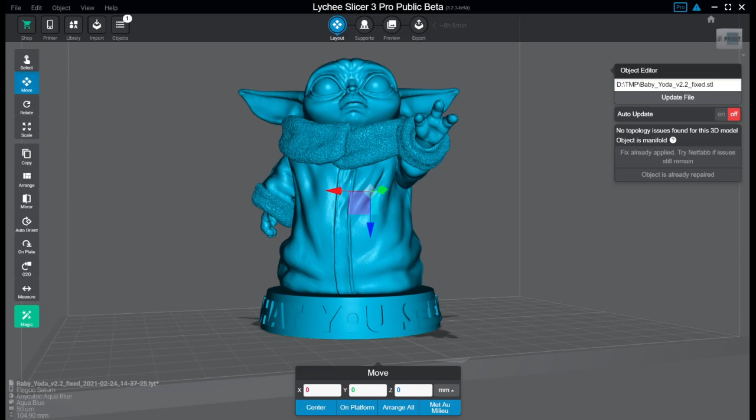But then we'll take a look at what we can do with this little fellow here when it comes to the leaning and the angles. Since I am working with an Elegoo Saturn with a 4K screen, I'm going to use 50 micrometers of layer height. We are going to use the 45-degree angle, and, well, something happened there, sorry about the glitch. I was saying that it's quite important that you try to figure out where you will have best benefit and which way to lean your print object. I like to have this hand going towards the bottom of the vat so it can grow undisturbed.

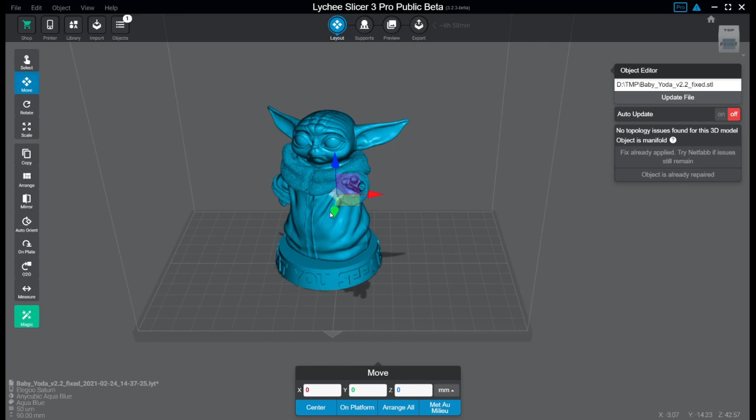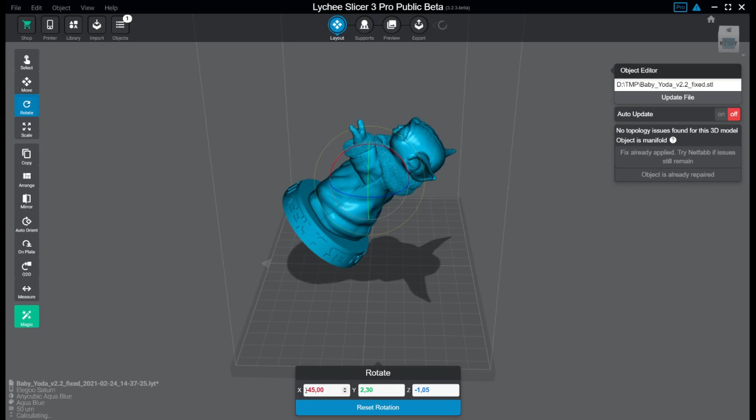So first of all, we're going to rotate him. No, not like that. There we have a handle. Minus 45 degrees. And yeah, I think that's going to be okay. I'm going to rotate him in this way as well, just so he'll fit on the plate nicely.

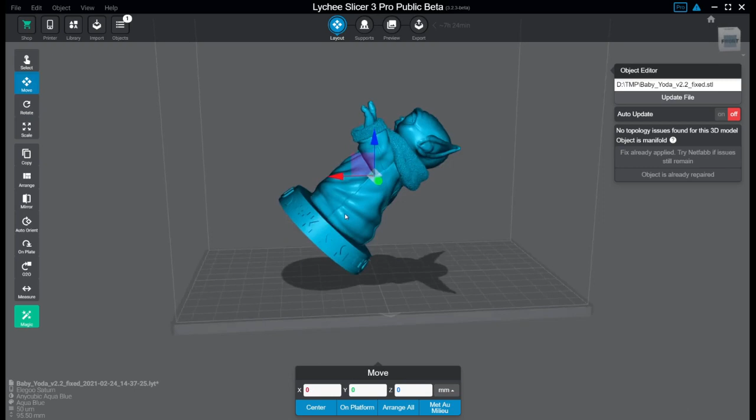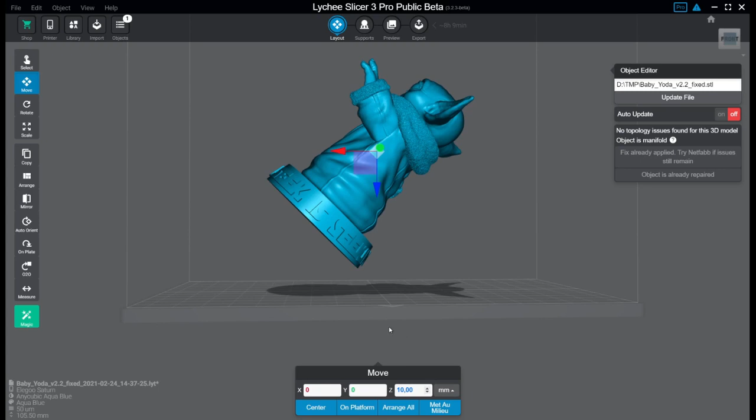Then I'm going to move him up a little, so I get him off the plate. I like 5 millimeters or similar, or up to 10 millimeters. 10 millimeters is actually really good, because then it will be able to build the supports properly below. So now we have the lean, and we have raised him off the plate. I think I'm quite satisfied with this position. And now we go to supports.

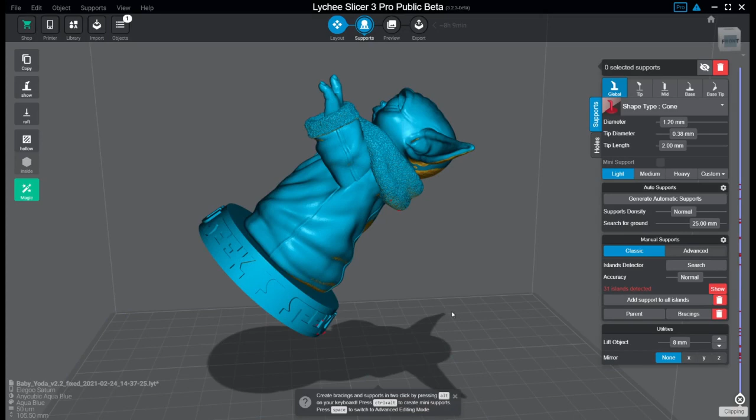As in the last video, I do an island detection first. 31 islands detected. As you see here, here's a bunch. So let's add support to all islands. And it actually caught them all. 0 islands detected. This is actually one of the benefits of leaning as well, because you eliminate the islands on the front of the print, and you get better access to the islands on the back.

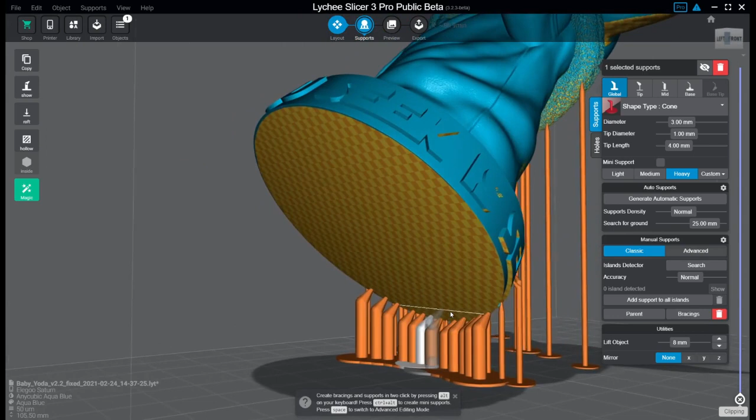And from here on, we'll actually just go ahead with the regular supports. I like to start with the heavy supports, and I like to build them as much as possible in the bottom of the print, so they get a steady hold. And I said in the last video that don't be afraid to use a lot of supports. And by putting the supports here on the bottom, you won't get so many visible marks of them if you have issues with removing them. But I use the heavy supports here, so we get a really good hold towards the plate.

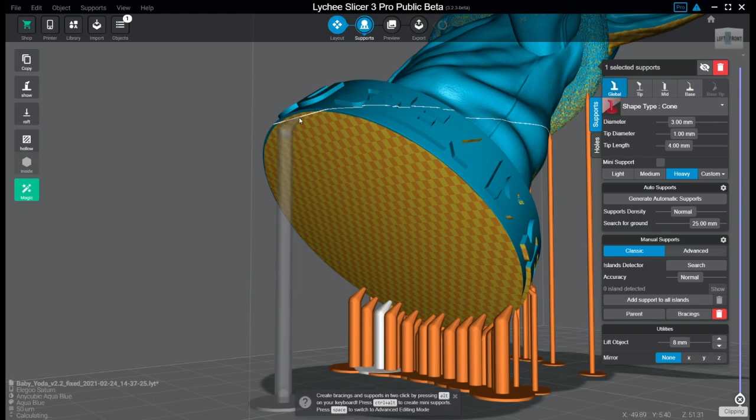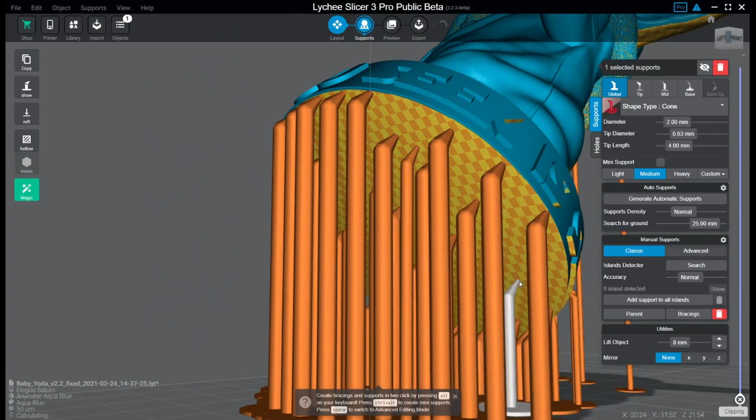And I actually put some up here as well to help stabilize the little fella. So in invisible areas, I do like a lot of supports and heavy supports. And when I've done with the heavy supports, I actually put on some medium as well in between, just to be sure, because we all know the feeling when your print is stuck in the bottom of the vat.

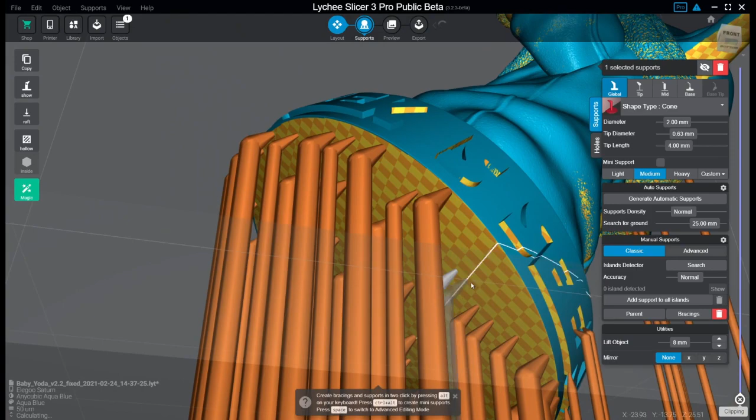Here we have got the little fellow quite well anchored, but we're still not done. You will have to put on supports elsewhere as well. Otherwise he will break off or similar. As you see here, you get these... I'll remove that support. You see, you get these white large areas.

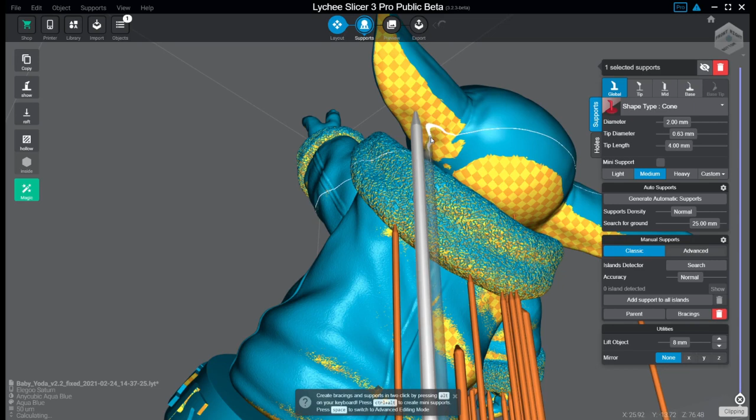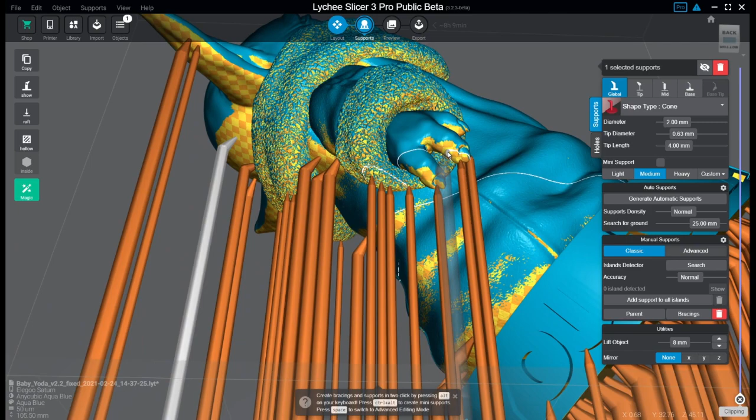These are the lowest parts of that area where you're putting on supports. So every time you get a large white blob like this, you see here, the line is thin, but here it goes bigger. It is always good to put supports on those places. Like here on this ear, and here you can't, but I can actually put one there. I'd actually like to support his fingers a little bit more as well. But it looks like the auto supports for the islands have taken care of a lot of the problems. We'll put one here as well. And one up here.

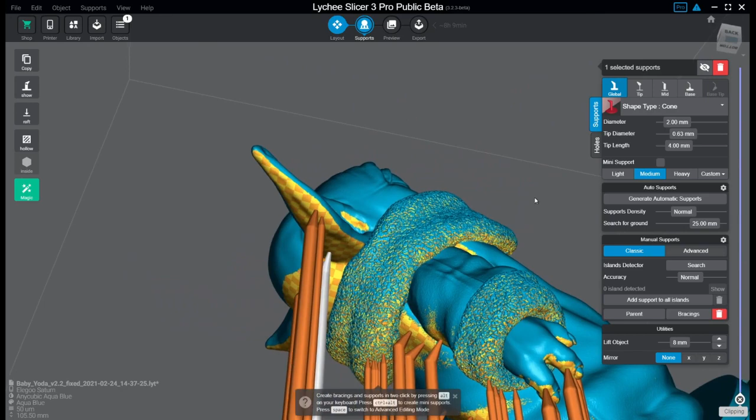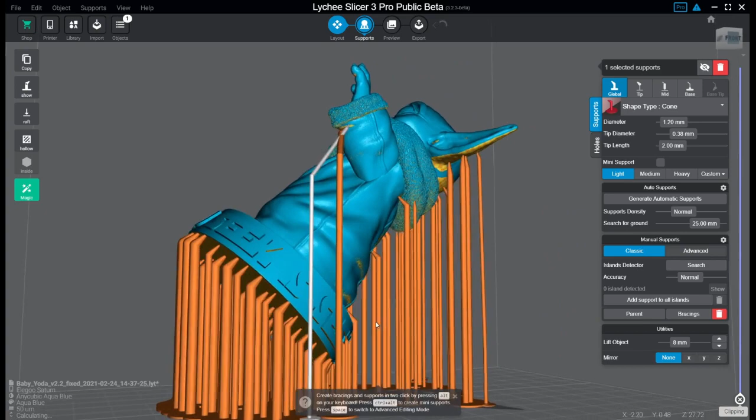Okay, look if you have any more larger yellow areas where we can put in some extra supports. All supports are helpful, but sometimes you have to consider the markings you can get. But at the same time, better little marks you can fill in with some extra resin and a UV light than having it deformed. I'll put some light ones here as well, just to show you what you can do more to get your print stable and stabilized. In the bottom here there's no idea to put any more supports. When you think you are done with supports, add some more. That's kind of a rule I run with.

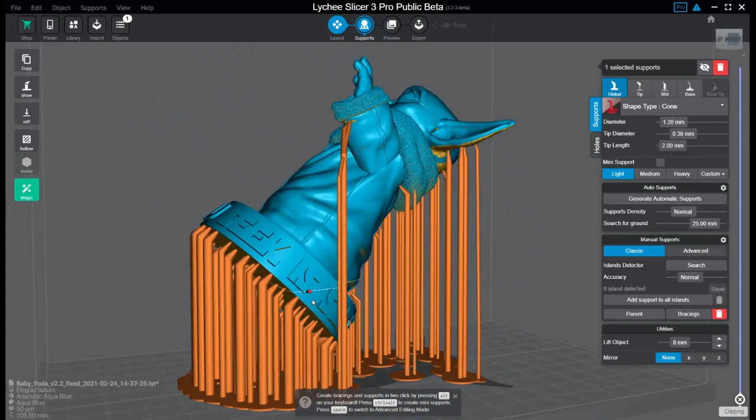Well, now here's a lot of supports, and there are a lot of thick ones and a lot of thin ones. And when you come to these tall ones, they get a little bit wobbly. So we add bracings. 440 bracings added. These structures make it really sturdy, so it won't wobble around for you. We can actually move that support a little bit closer here and add more bracings. Okay, it didn't want to brace it. You can, if you feel you need to, like I do with this one, add bracings by holding down the Alt key.

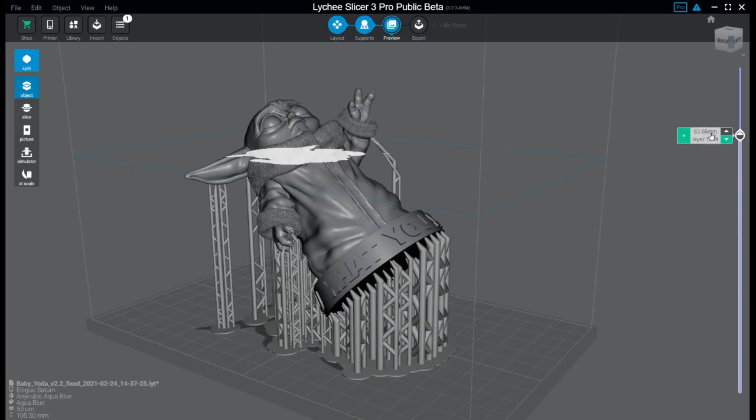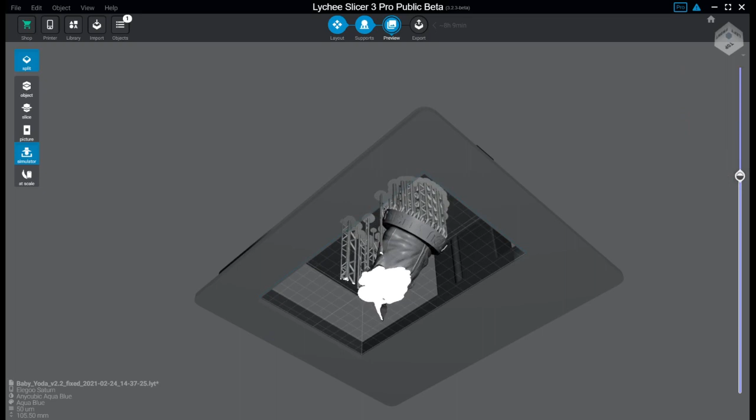And sometimes that happens, which is not what I wanted. Actually looks really good. And you do not disturb the front surfaces at least, which is more or less the parts you want to see anyway. Let's take a preview. You can see layer by layer, and you can actually run it in the simulator. And this one is actually not so bad to run in between. You see if you have missed parts.

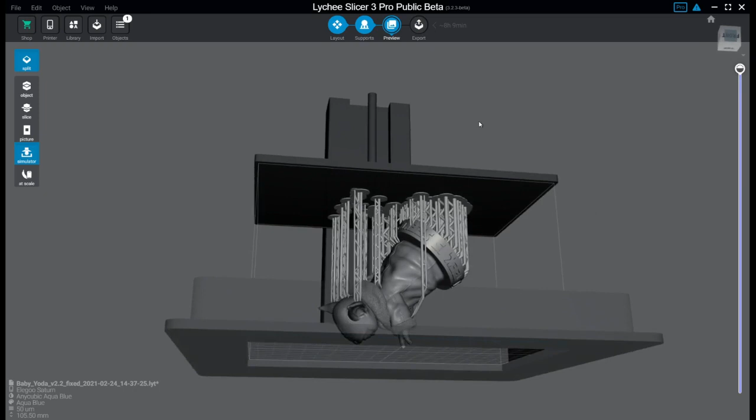I have found some obvious places that are not that visible, that are hanging where you didn't think you had any issues. But I think actually I'm satisfied with this one. So I hope you got some ideas on how to proceed with your supports, and I say as I used to, this is how I do things. Usually I succeed, and if I haven't succeeded, it's usually because I haven't put on enough supports. So this could probably need even more supports, but I think it will hold up really well right now. So this was what I had to present to you today.